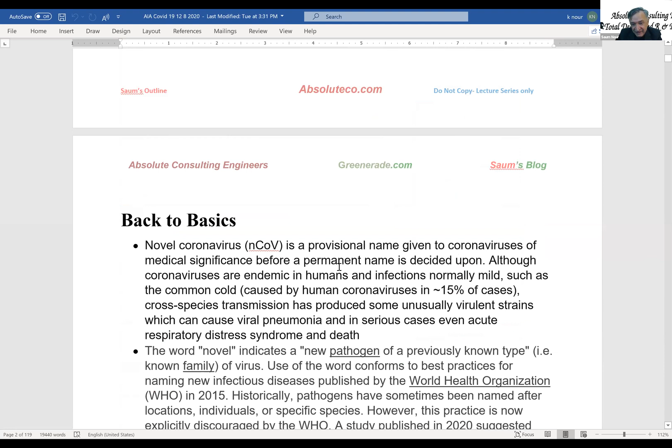Let's go back to the basics. Coronavirus is a virus that is out of a family, and it has little crowns. That's why it has corona. It has the word novel because it was the first time. They added 2019 to it because that's how it was found. There are two groups of people, WHO and ICTV and ICD, who decide on the name of a virus.

This virus essentially gives you about 83 to 99% fever, loss of appetite up to 84%, fatigue, loss of smell, bluish face to the lips, decrease of white blood cells, kidney failures, and very high fevers and so on. These are some of the symptoms of this particular virus.

I actually gave this talk in a minor short version of it in June 15 to the ASHRAE. At that time, we had only 2 million cases and 115,000 people died at that point. Right now, we are close to 15 million. Actually, as of today, we passed 15 million, and we got 283,000. In this particular case, we had about 1,000 persons dying every day.

That was what I call 5 plane crashes. This one is considered about one 911 per day. That is how bad this thing is.

There was one source that I would go to, but I changed my mind, and I'm now going to Johns Hopkins, this particular site. As of 8/26, United States is 14.9, 1.5 million people died in the world. Some of the numbers, especially in some of the African countries or South American countries, their numbers are not very accurate, especially like Ecuador, etc. So this number could be much, much higher than the 1.5. I will not guess at that.

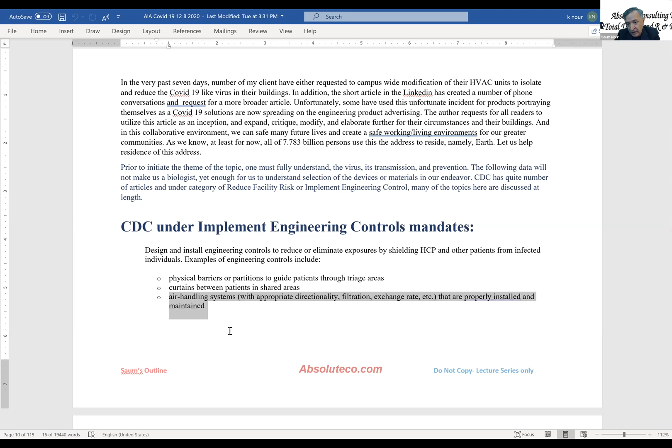Another issue is there's a town in Southern Orange County where we were going to change all their air conditioning systems, but because of COVID they pushed the budget 2-3 years out. The entire city hall is getting changed, and I'm redesigning it based on the items you'll be listening to today.

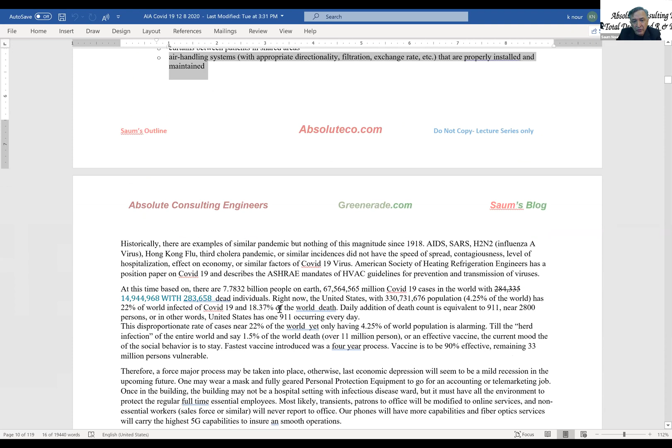So this is out there, and these are some of the numbers I mentioned about COVID - 67 million COVID cases out there. These were the numbers in June, and these are the current numbers. I mentioned 22 and 18.37% death, which is bad.

Let me give you one more item. This is a YouTube video from my brother's son, who is a scientist at the VA in Oklahoma. He sent this - it's in my blog currently, you can put it in, I'll put the whole thing there again. Please go to that - it shows in graphical form how COVID-19 actually attacks the system.

Let me give you two small items right now. The vaccine czar of the country is a Moroccan or Algerian guy, bald-headed, very tall, who simply said the reason this vaccine only took 8 months to make was that for the past 20-30 years they've been doing a lot of little subroutine programs for creating vaccines.

So what they did was literally take a lot of items off the shelves, and Pfizer or Moderna, or Oxford, simply took items from the shelf and reused them. But what's interesting about mRNA is that about 20 years ago, an individual found a gene within the body that can be taught to tackle any foreign elements in the body - that's the mRNA, and that's a 20-year-old item.

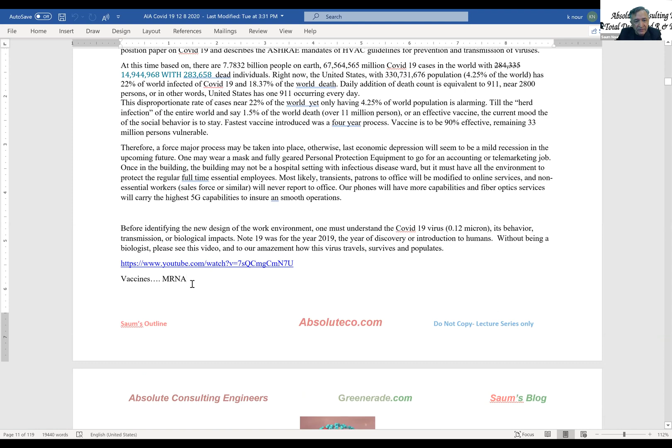I will find out who that scientist was. I would actually like to bring this up.

Just because you guys are architects, let me mention - in Paris, somewhere around 1853 to 1870, because of the major pandemic through the sewer system, etc., Napoleon III began modifying Paris, and it went all the way to 1927. They modified the entire country in a renovation called the Haussmann renovation. They remodeled the town in order to comply and get rid of all the diseases they had, based on overcrowding in the suburbs, etc.

In London, about 1854, there was a Broad Street cholera outbreak, or Golden Square outbreak. The same thing happened, and at that time 616 people died. That district was also modified in order to get rid of the infection. This was literally modifying the city - although cholera was not a sewer issue, they modified everything anyway.

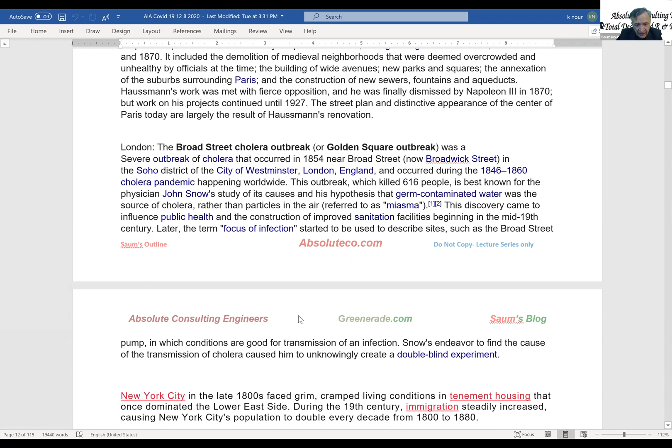Also in New York City, about 1800, it was called tenement housing. People were literally dying because of overcrowding and the squalor. And guess what - by 1900, about 18,000 buildings were built, housing 2.3 million people, about two-thirds of the whole city's population.

So I'm thinking those are at a city level. Based on our discussion, we'll be looking at - there's very little discussion on AIA, very little on ASHRAE, about what to do with the buildings. We'll have a little bit of examples.

And by the way, I am an engineer for 3 high-rises in LA, and unfortunately because of the cost, etc., nobody's moving on that.

But again, there are two areas that create change. One is when the legal battles begin. Right now the Republicans are asking, in the new money being released, that they give relief for all the employees of the factories or companies so they will not be sued. So there's that discussion right now, and that's one day old, by the way, this story. But the issue is you still have the civil court.

At the same time, the codes may start changing something - I know with Ebola, if you recall, when Ebola was happening, a lot of touchless, handless toilets and toiletries came about in bathrooms. At the same time, these have not gone away - influenza is still there, cholera is still there, malaria is still there. Those are emerging, and these were the previous ones still out there, with recent outbreaks.

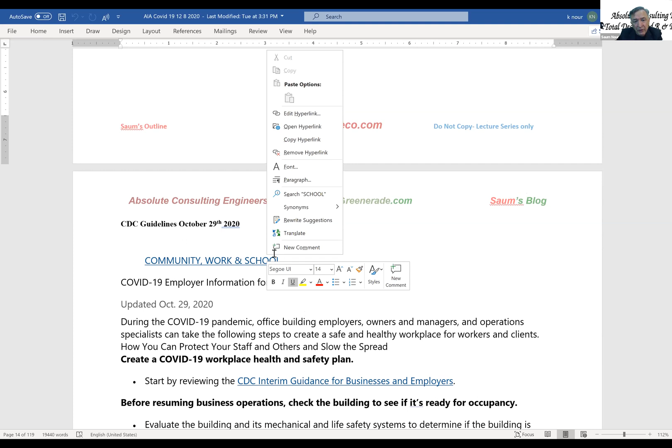Going back to CDC, if you want to sue somebody, you have to have a reference in CDC. I picked this thing up, and it's in 2 parts. By the way, these are hyperlinked, so once you pick it up, you can touch it and go to the hyperlink for the entire article. I broke it down to today's portion as well as part for next time. This was written for community work and school, and it goes through and brings up the following.

First of all, this ASHRAE guideline is very old. It has nothing to do with ASHRAE 160, nothing to do with our discussion. But all these other items, the stagnant water, rodent pest, and mold controls, are in the green code. Nothing has been addressed.

But I'm going to bring up this issue. Employers are responsible for providing a safe and healthy workplace. So if you invite people back to your workplace, God help you. I believe I have a slide that says once you pick up COVID, if you're asymptomatic, nothing will happen—you're just going to be a carrier.

Just to let you know, 34% of all the patients who went to North Dakota to do blood tests for something else, ironically, 34% of those blood tests came out positive for COVID. And they're assuming that 50% of North Dakota and the Dakotas are right now COVID positive.

That's another story, but just to let you know, if an individual picks it up, it's within 3 days before the symptoms actually begin. So if a guy comes in and becomes infected, and he got infected somewhere else—I have a very elaborate Chinese study I'll show you that he could pick it up somewhere else—he could simply say, look, I picked it up in my workplace, and that will trigger a case.

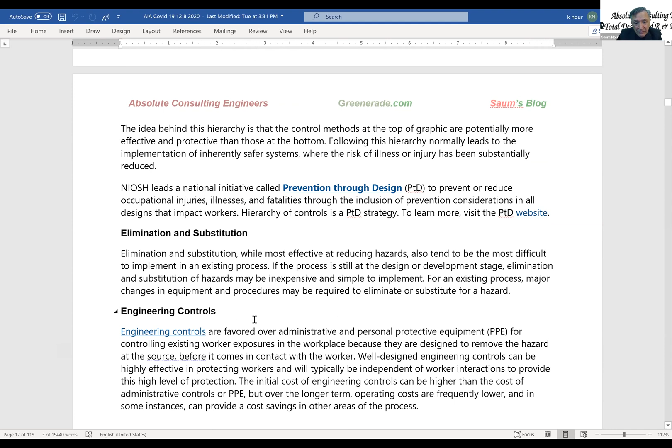Some of the engineering issues I'll be discussing here involve clothing, air conditioning, or isolation through NFPA 101 that you all are very good at. You have an administrative control as well as PPE. I would simply say you'll have someone like Bill Calvert or some sort of policy control within the company responsible to ensure everybody within your workforce is doing all of these administrative controls, just to ensure the company is safe.

Of course, you can modify and adjust the seating, furniture, etc. to meet the 6 feet guidelines, but I'll show you that this 6 feet is arbitrary depending on if you're next to me. I'm very active, I'm always jumping up and down, I could be 8 feet or 12 feet away. And if I sneeze, it could be 26 feet or 40 feet. So all of that is just to let you know it's an option.

One of the most critical parts is the bathrooms, and I have a section coming up in the next session. I'm actually talking to Zern on that issue - how do you make the bathrooms work, because that's the most congested section. And if you go to Home Depot, etc., they've blocked off some of the sections and so forth.

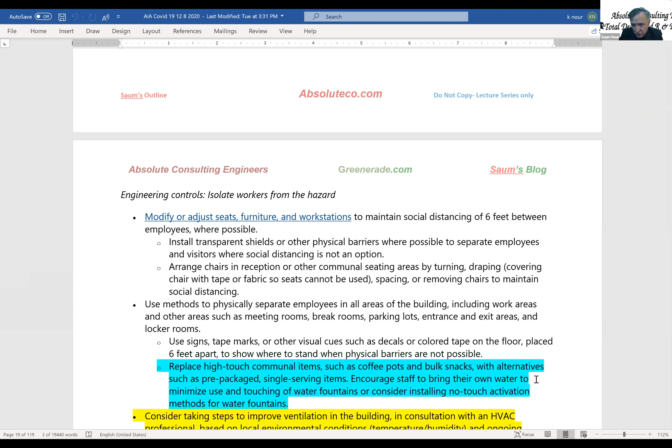I'm going to bring this up right now. There was a CNN conversation that simply says, if you're going to the airplane, what would you do? That simply says you want to have at best a minimum number of touches to the surfaces - your coffee maker, your doors, your chairs, etc. That's one part, so it would be a no-touch activation method.

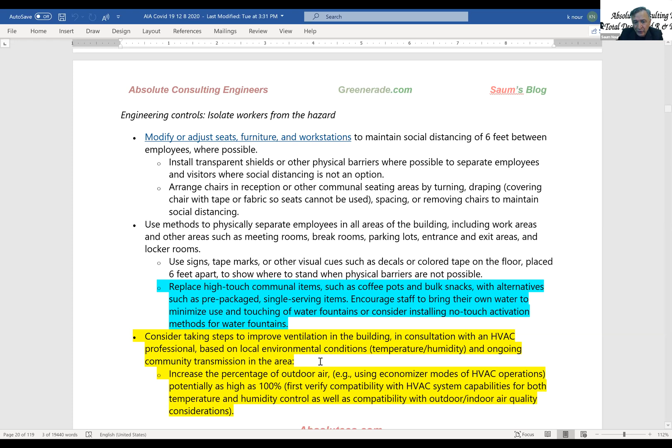And in this particular case, the HVAC - these are, I got to tell you, mumbo jumbo. It is there, but there is zero information by anyone on what to do. But these will be used when the Jacoby & Meyers calls you and simply says, did you do this? Did you do that? For those of you who don't know, Jacoby & Meyers are the attorneys who are ambulance chasers.

But anyway, this right here is total airflow supply to the occupied space. Again, if you recall, if you do LEED, or if you're just a basic building, the California Building Code as well as the energy codes require 15 CFM per person. But I can tell you, guess what - you have to maximize it if you want to reduce the liability.

Demand control ventilation - if you were in my class last year for Title 24, DCV is now part of the code. But guess what, he says, excuse me sir, disable it, out the door, goodbye, done. So you have to go in and double-cross that. It's no longer part of Title 24. So you're looking at Title 24 issues.

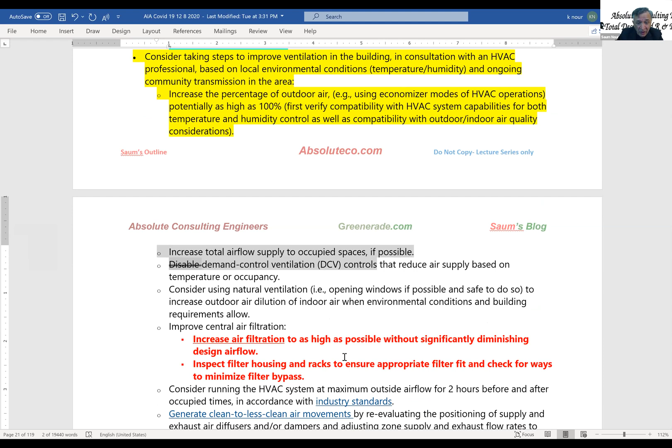They are asking for you to change the air filtration, and I'll get into very detailed information for that. By the way, just to let you know, once these filters are done and they're all contaminated with COVID, your air conditioning guy has to go with full PPE to remove them, because now these are fully contaminated and part of the process. So they want to make sure there's no leakage, and that's part of Title 24.

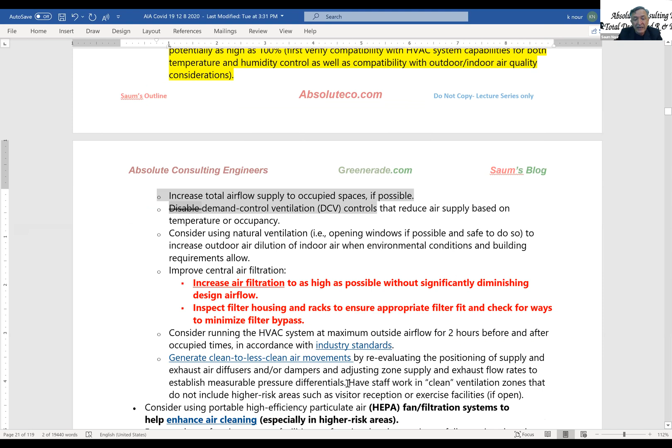And you want to bring some outside CFM - generally they call this morning flush out. At the same time, you want to change the room with fresh air in economizer mode, so that it starts again clean to less clean air movement. So if any of you have done hospitals, this would be the concept - you're going from clean to soil, etc.

I don't do a lot of hospitals, but I do small surgical centers. With regard to HEPA - HEPA you can consider it, but you can't use it. Why? HEPA actually has 1 inch static pressure. Unless you're talking about a laboratory, surgery centers, etc., you cannot use HEPAs.

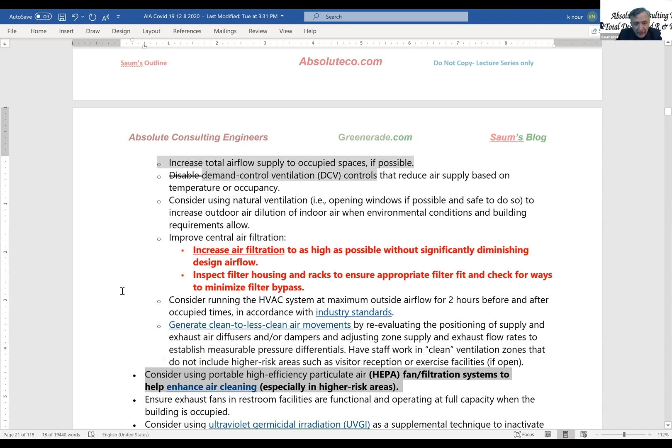Your normal air conditioning does not have that static pressure. So if somebody says, I'm using HEPA - and I've seen a lot of these churches simply say you're doing this, and ironically it's the pastor who is saying it - I believe they need to go become a mechanical engineer first before they do the preaching.

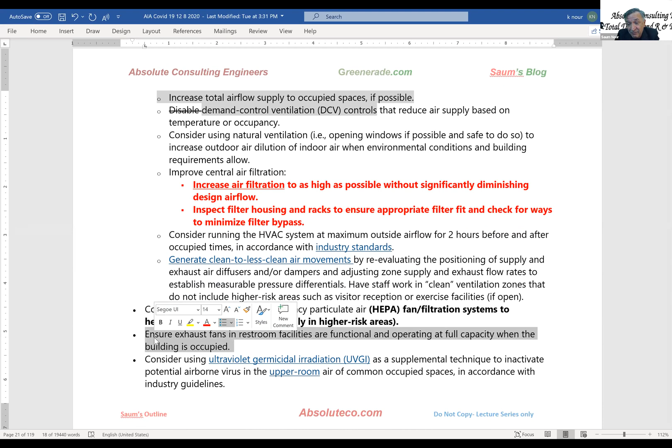And we are also talking about restrooms. The restrooms I am considering, remember that the code is actually asking for about 10 air changes. I always design by 20. In this case, I will create a hurricane. The most critical part is to create the amount of CFM within the exhaust fans, and also it has to be uniform, so it cannot be collecting from one person to another, and then exhaust out. We have to ensure that generally exhaust fans have only one point of entry. That has to be done.

Now, ultraviolet, and this is called germicidal irradiation. And the only thing I know about UV is extremely high. I have a very, very large koi pond, a very large one. So I put 120 watts, and I know all about it.

And there are 3 types of UVs, UVA, B, and C, and we'll discuss that a little bit later.

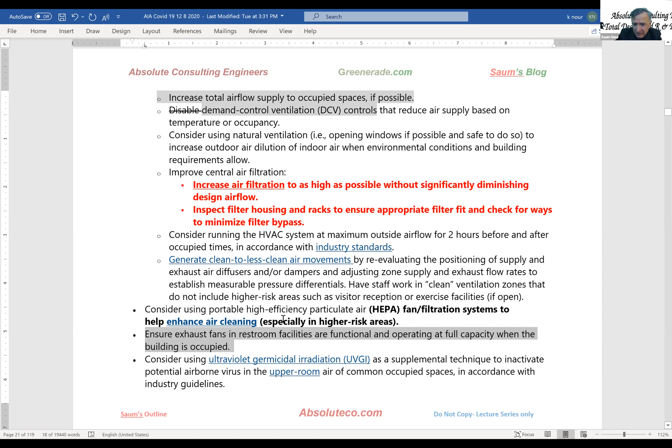So these are all coming from CDC. If you are looking at a reference, that's CDC. There were 3 publications that I bumped into, which I'm sort of bringing in. One was a British journal that was actually done for WHO and the European Union. It was very, very detailed, the appendices were very, very detailed. It was written in an extremely boring format, very, very boring. But the beauty of it is they discussed CFM, outside air, etc., though in liters per second, not CFM.

The Chinese, there are actually these 3 guys, Jia, Zhang, and Li. They've done a ton of papers on COVID tracing, and they've done a very, very good job, and I'm going to show you.

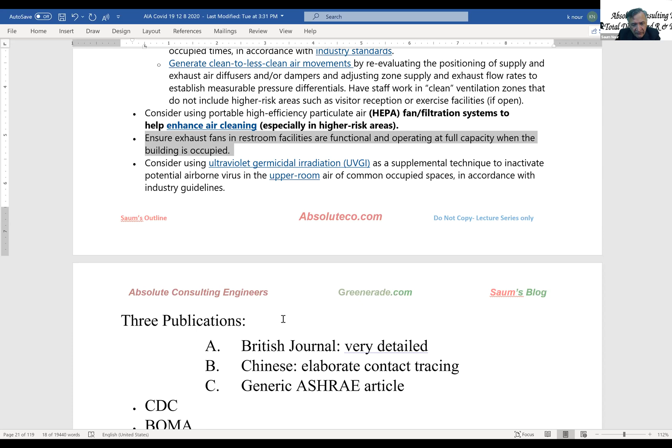ASHRAE did not get into this discussion, but they wrote a very nice generic article, and they do say that they don't have a publication or a paper that they could issue for the engineering community. There are a bunch of other sources, CDC that I mentioned, BOMA that I've actually put in for the next section.

Legal firms, I picked up some of their spiel, they're just getting ready to start suing people. AIA has it, but very, very, very generic, there is nothing there. Gil said that Orange County has a site, and Gensler has done a reference section, etc., but nobody has come up with anything. The only thing AIA has done is primarily telling architectural firms how to control their firms, etc.

One of the items I'm going to discuss is a trace analysis that Jia, Zhang, and Li did. They actually followed 3 towns, Liaoning, Heilongjiang, and Jilin. They went to these 3 towns and simply compiled all the individuals who were infected. How did they get infected? Let me show you, I'm going to zoom in.

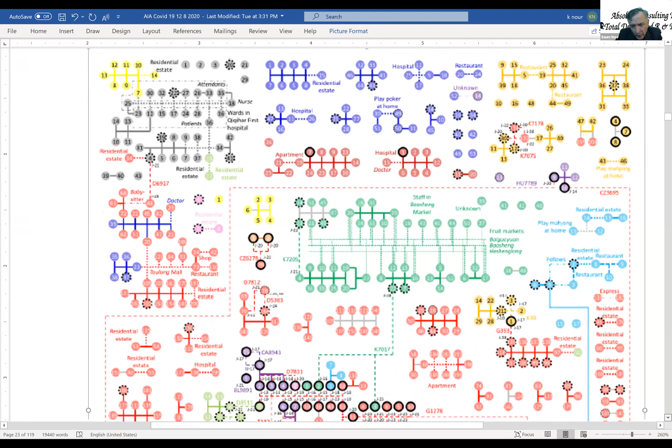How did they get infected? They did a very, very good study, and I will tell you where our discussion is. This is within restaurants, this is within public buildings. This is a family gathering, we will not discuss that. This is public vehicles in terms of buses and so on, we will not discuss that either. So we are interested in these public buildings and these restaurants.

As you can see, the very, very concentrated dots, as well as just slight differences - these individuals got infected, these were family members, and apparently this guy travels with a bus and infects these 2 individuals, and all of these individuals, and these are the different districts within a town that they went to. So this is very elaborate, very nicely done.

So really the most critical part for us is what happened and transpired in the restaurant, what transpired in the public buildings. And again, don't forget, once we open up and have the vaccine in our arms, etc., in my case just one arm, once we have it, the issue is do we trust it, in the sense that we have to be immune every 4 or 5 months.

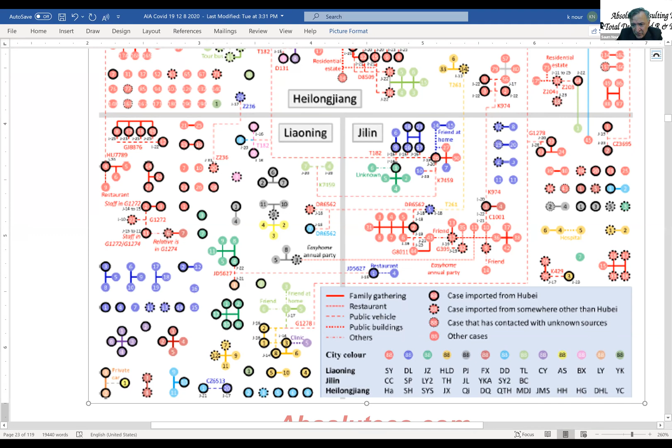We've got to continuously test it. And what happens if I'm within the 10%? I'm going to be causing more pain to others. So that would be some of the issues. This is one of the items we are discussing.

The Supreme Court has simply said, based on the First Amendment, churches can be opened and you can have a demonstration or do whatever, as long as it's First Amendment protected. I don't know what this means.

I know the church with 3,000 people that Trump went into in the beginning was in Arizona. The 2 pastors were simply saying they have all of these elements in the system, and we'll discuss some of that here. Again, all of these are probabilities. I'm a nuclear engineer, I studied probabilities.

So the issue is hopefully nobody dies. Even one person will trigger legal battles.

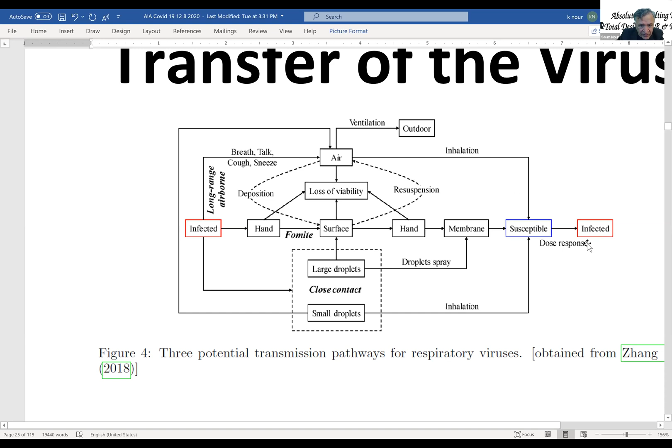Transfer of the virus, again, this was from Zhang's paper. This is the individual getting infected. He's going through the hand, going to the surface, a loss of viability, and he could be throwing droplets. We'll discuss the droplets and the contacts, and the droplets could go through a membrane, susceptible, and it could be going through the air, through inhalation, and you would be infecting somebody else. So these are the means and methods of the transfer.

So we have to know all of these issues and be able to do better design parameters. I will discuss in a few minutes on surface contamination. I did not know I'm actually going to be using my master's and my PhD work on this paper.

There are 2 theories I'm going to bring up. One is called Saum's theory - I wrote this paper in Nuclear Engineering and Design back in 1980, and I worked on nuclear bubble nucleations. It simply says if you have a rough surface with little bubbles of air and liquid, it's better for you not to have these - you want a very smooth surface so that you will not be collecting coronavirus infection on those surfaces.

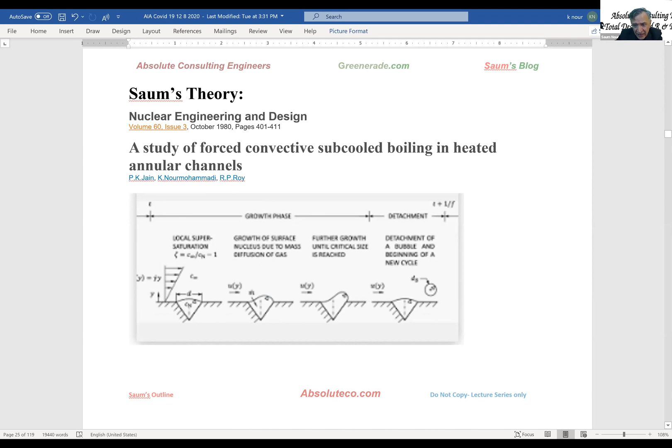At the same time, in my PhD, I was studying surface roughness in uranium mines. I have 3-4 papers out of this that simply say when the surface is very smooth, you're going to collect less radiation on the surface.

So the Saum's theory, based on those 2 papers, says that if you have a smooth surface, you can clean the contaminant easier, no deposit with time, and you will not have collection of contaminant sources for dispersing, i.e. COVID or whatever you have.

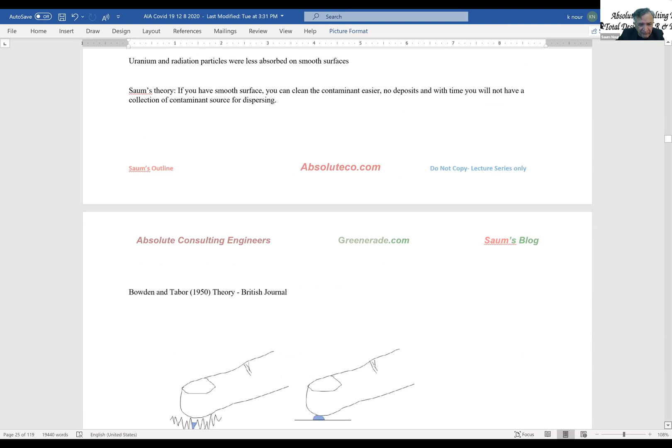Ironically, I ran into this paper which is completely opposite of my discussion, by Bowden and Tabor in 1950, that simply says, hey, have the roughness so your hand will not be touched.

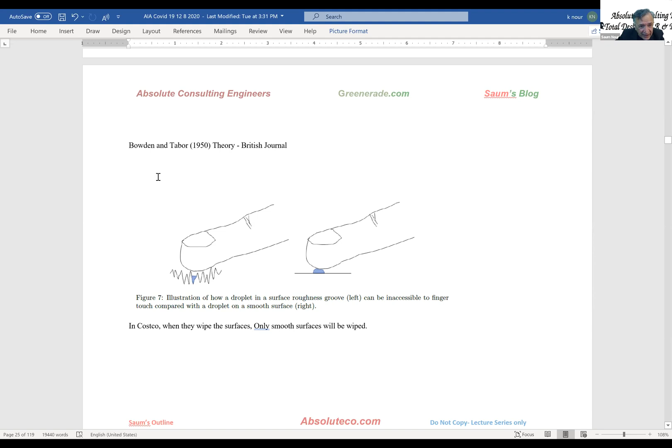Ironically again, if you go to Costco, every time you're in the self-help area, every time somebody uses it, the lady mops it out and washes and leaves. If the surface roughness is more, that lady will be scrubbing these roughnesses to get those elements out. I believe I am right, and I believe Bowden and Tabor are not correct.

Anyway, this came out of the same paper, Zhang's paper. Just to let you know, and this is very, very interesting.

In one of my past jobs, I was working on the Venetian mud on the walls, and the individual who was collecting it and making it actually sold it to Sherwin-Williams for the rights of it for 10 years. He was looking at adding aluminum oxide to the elements, because what happens with aluminum oxide is if germs, etc. sit on it, the life expectancy of that germ goes away.

And then the other issue is that if you use copper, for example, the survival of the aerosol COVID-19 is only 4 hours. Cardboard or paper is 24 hours, plastic and stainless is 72 hours, and COVID actually will survive in the air for 1 hour.

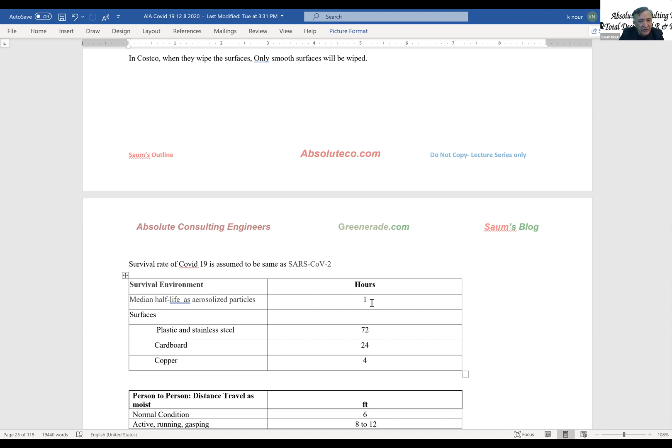So if you are dropping plans at the City of Los Angeles, they drop the papers, as well as Newport Beach - you drop the papers in a bin, and then 24 hours later they actually touch the paper, and they do the same thing in reverse.

Again, this discussion that you have here, because of time, I didn't want to put it in. There's a very, very nice projection, both Princeton as well as MIT, of coughing out of individuals. It goes from 26 feet to 40 feet.

Again, if you're like me, hyper, going back and forth, a very high decibel voice, that's 8 to 12 feet, and a normal condition would be 6 feet. These are the travel distances of the moisture without a covering.

Just to let you know that COVID-19 is about 0.12 microns, or 120 nanometers. If you have a surgical mask, that's 89% effective, not bad. A regular vacuum cleaner filter is 86%, then dish towel, etc.

Right now, in the beginning they were having a hard time getting N95s or these triple-fabric masks. They simply said just put anything there. Right now, they are begging people to use proper masks.

I can tell you the price of those masks. I used to buy them at $1.25, then 75 cents, then 30 cents. You can buy them at bulk price for less than 10 cents now, just to let you know.

When I was flying, I was putting on 2 plus another item. I was like a monster, or a surgery center, inside the airplane.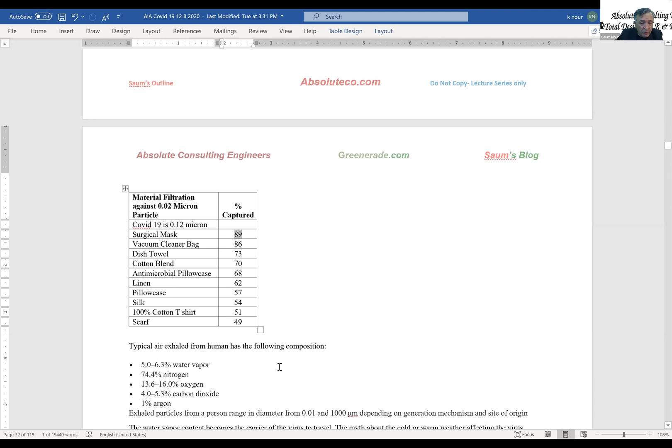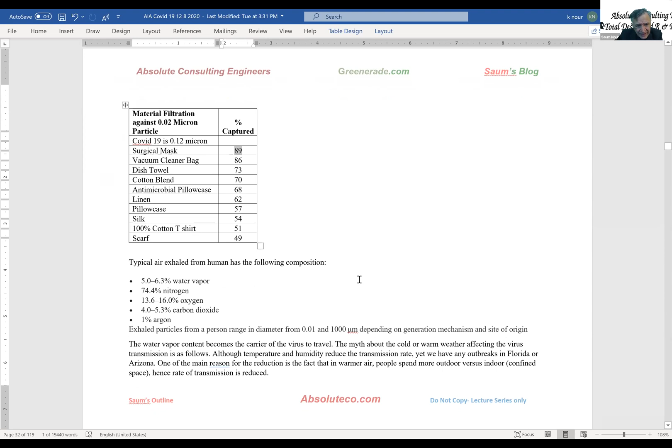But they are pushing and begging people to go with at least the pleated hospital mask. So anyway, there's all that discussion. All of this is discussion to get you ready with knowledge, so that we can build design parameters.

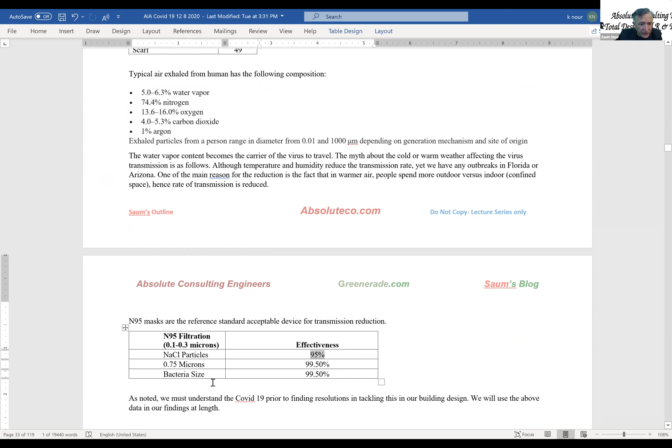Again, N95 gives you 0.1 to 0.3 microns filtration, about 95% effectiveness. Then you could have something more solid, better than N95, depending on the system and micron size in terms of bacteria size. But a virus is much, much smaller.

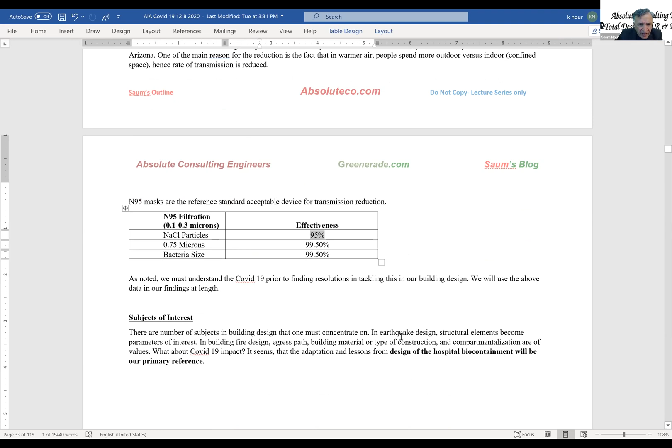The other items I'm bringing up, we've all studied as architects. We know the building design issues, and we're going to concentrate on those. When we're in an earthquake, we have all these seismic elements. When we deal with fire, we're dealing with compartmentalization, NFPA 101, Chapter 3 and Chapter 5.

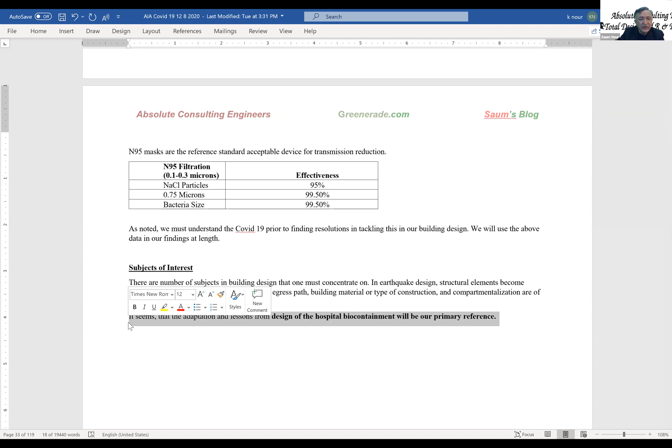What about COVID-19? At the end of the day, really, it becomes partial fire design and partial hospital design, partial of everything. We have to take all of our subroutines of knowledge that we put on that shelf, pick them up, and use them for the interest we're looking at.

Again, I just pray that AIA Orange County will form a team or a group so that I will not be the only spokesperson, and we can go into different tangents, especially on surfaces, on different formats.

My DNA, because my father was in stone and I'm a stone man, I put a ton of it in my house. You want to have the grouts with the minimum format, so you have the least grooves, et cetera. Those are some of the issues.

So again, I'm going to go back. In one of my educations, I spent 3 years at UCI studying fire protection engineering, so I really got intimate with NFPA 101. NFPA 101 is technically the gospel of the California building code, or the CBC, or the building code, because of the compartmentalization, the fire egress, et cetera.

Everything comes from there. So really, we could take a lot of lessons from there and apply them to COVID-19 design formats. Now, if you go to Walmart, of course, nobody actually follows it perfectly.

They have put in pathways, so no two individuals' faces will be crossing each other. They have separated the exiting and the entrance. Mind you, you still have to have fire exits, etc., but for COVID-19 you have to have a one-way path: you come in from one door and leave from the other, so no two points cross.

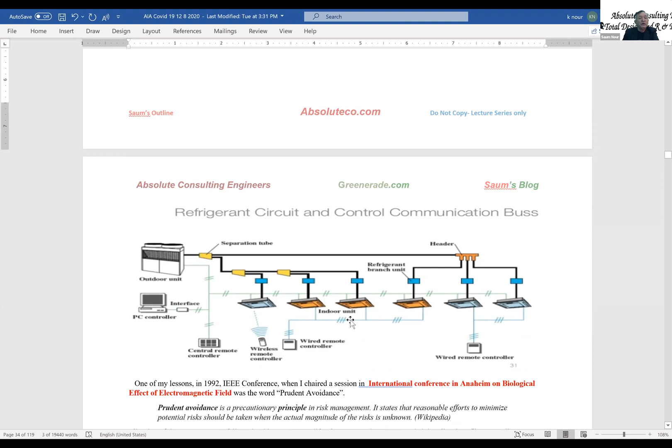In the high rises, there is a solution, or for existing buildings which have VAV boxes, there are solutions for them that we will discuss next time. I'm trying to stay on the basics right now. This is a system I just discussed. You have the outdoor unit, and you simply feed all of these throughout, and you bring fresh outside air to them, with a central exhaust fan, with no kind of cross-contamination from one area to the other. Each one of these will have all the amenities that we will discuss very shortly.

In 1992, I chaired an international IEEE symposium, an international conference in Anaheim on the biological effects of EMF. I don't know if you recall, people were saying that EMF was going to cause cancer. And every time I would go to a building, they'd call me Dr. Bzzz, making fun of me. And I learned one thing there: it's called prudent avoidance.

Technically speaking, if you are the architect, you have to do the same thing as with Y2K, the Y2K 2000 issue, everybody had those CYA notes back then. You may have to add a note stating that you are still designing the system the old way and not considering COVID in the design. You have to announce that, maybe in your contract.

At the end of the day, prudent avoidance simply is a precautionary principle in risk management. It states that reasonable efforts to minimize potential risk should be taken when the actual magnitude of the risk is unknown. So if you don't know it, you just do due diligence, and that had to do with where you put the electrical systems, where the electromagnetic field was, and whether that was causing me to lose hair. Was that EMF, or was it just age? Regardless, that was a lot of issues.

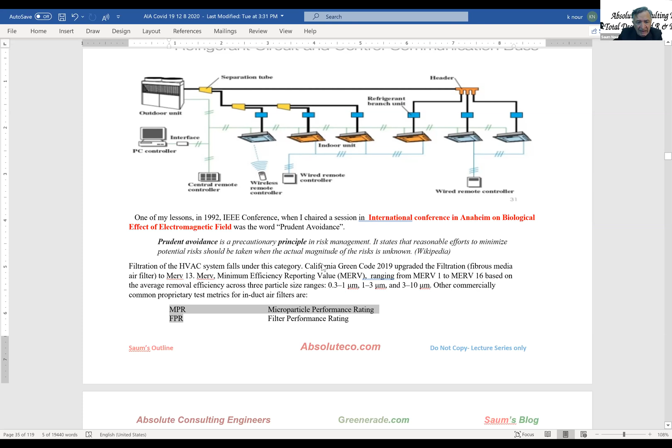Now, what is happening in MERV 13, MERV has nothing to do with Merv Griffin, the guy who had the TV programs. MERV essentially stands for Minimum Efficiency Reporting Value, and it goes from 1 to 16. Once you go through 16, you jump into HEPA. I will guarantee you, we have done the studies, and I highly suggest you cannot use these. MERV 16 is very expensive, and MERV and HEPA have very high static pressure.

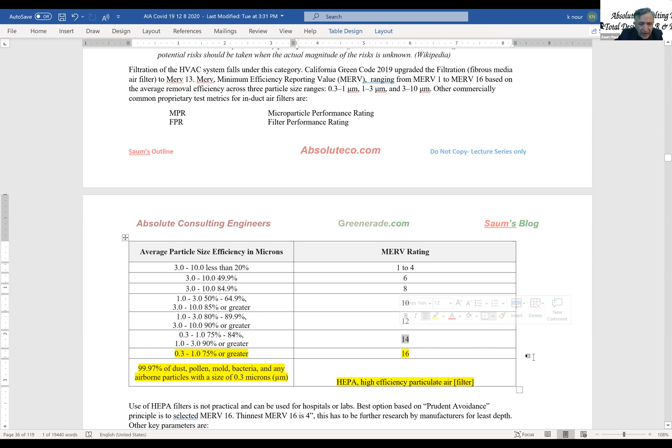You really can't do much with it, so you're really stuck with MERV 13, which is right between the two, and that's where the problem is. We have actually done this study in a couple of places, and it did not work well. We are really trying to make sure that the air velocity comes down, and as it comes through the filter, it has to be about 300 feet per minute. If you're at 500, the efficacy of the filter just goes down.

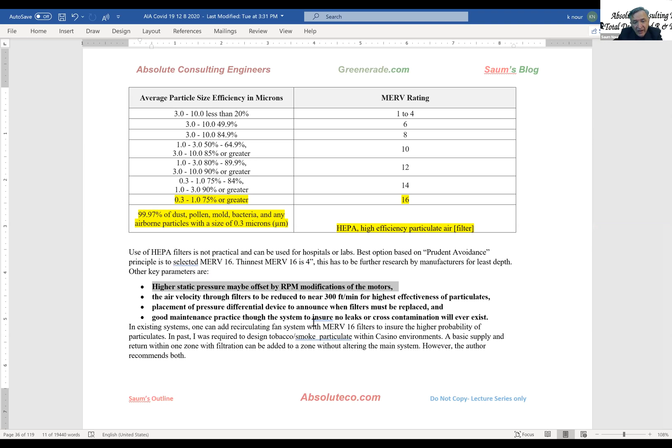There's also the placement of the pressure differential, etc. As soon as that filter is concentrated beyond a certain point, you want to change it. And don't forget, the person literally has to be in a spacesuit to go in and take them out, because now those are all contaminated. You have to have good maintenance and make sure there is no leak, so you don't have a giant hole where all the air is passing through. You've got to make sure that's being picked up. So those are some of the issues we're looking at.

The heating and maintaining of these, by the way, I did not write these myself. These all came from different papers, CDCs, etc. So the issue of HVAC is that you want to have the right indoor temperature and humidity.

By the way, humidity does have an issue. Odor, we are not going to discuss. Removal of the contaminant air, which is what we discussed. Susceptible staff and patrons - you want to make sure the requirements protect the individuals who are there, and you want to ensure the risk of transmission to the individuals is less.

Now, these are some of the discussions that I'm going to bring up. And by the way, I'm going to open up at some point - I really want to get your opinion. If you put it in chat, I'm going to copy them and maybe put a response, because this is a very new frontier.

I know a lot of you have come with good backgrounds in architecture and different formats, construction, etc. So we all need to put this frontier together. And again, this thing is not going to go away.

By the time we are done with this infection, the vaccine, etc., if we do it correctly - and I'm going to put a correct quotation, if we do it correctly and if everybody gets vaccinated - you're looking at beginning or middle of next year, or maybe towards the fall of next year. So just an FYI.

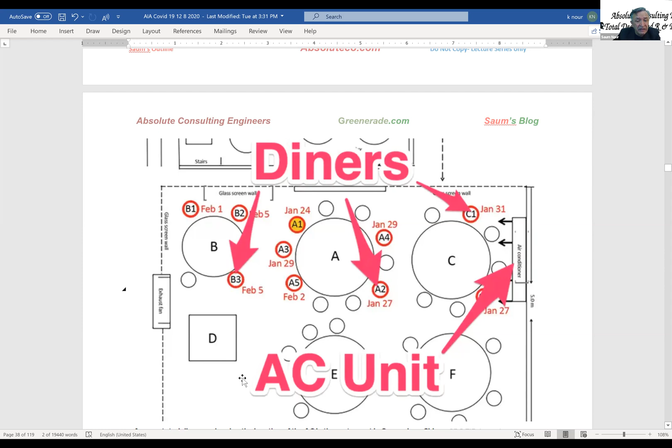You can see the air conditioning path was going this way, and that's where A1, on January 24th, 29th, 27th - A2 picked it up. 29th, A4 and A3 picked it up. Then in January 31st and 27th, these 2 picked it up. Then in February, ironically, these individuals did not get it. This goes back to my statement - the design of the air conditioning, etc., is interesting.

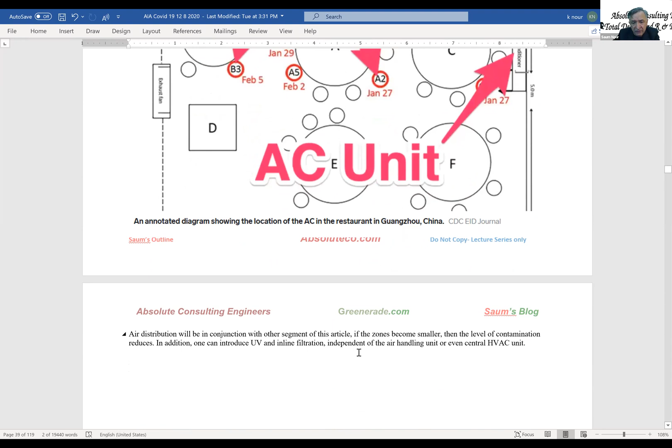This was in Guangzhou, China. They are simply saying that by adding UV lights, inline filtrations, etc., you could reduce this probability, and it will show some of the probabilities there.

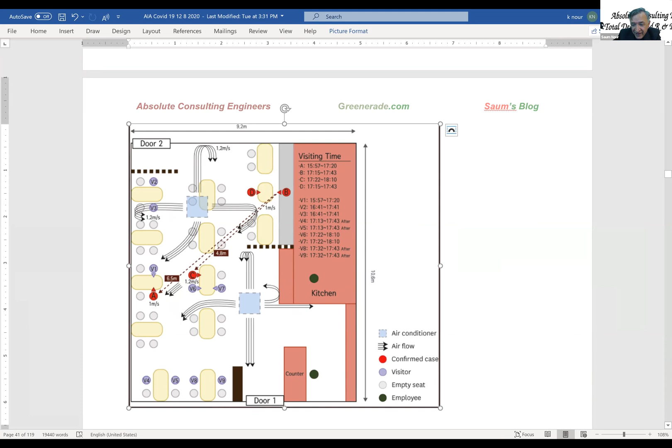As you can see, I don't go for a haircut - I've been cutting my own hair. With one hand, one side looks good and the other side doesn't, so it looks like the Phantom of the Opera. And I will not go for a haircut.

In any case, they are simply showing that they were 21 feet away, and in 5 minutes the interaction and the infection occurred.

As you can see, 3 families - 9 other people across 3 families got sick, and so on and so forth.

There was one incident that happened in Irvine. There was a wedding, a kids program, some religious program for a kid, where 238 people were in that party in Irvine. The family members got it but did not know. They went to Mexico to another family member and infected the entire family in Mexico. They came back. The lady was the 4th Irvine patient who got hospitalized, and the son, the father and the daughter were not hospitalized, but the mom was the 4th COVID patient in Irvine.

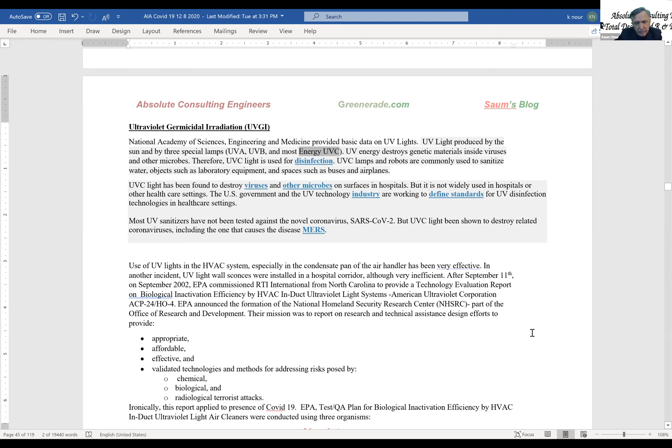The other beauty is that also within an air conditioning system, it also gets rid of the mildew within the body because the light propagates through the air conditioning. It actually gets rid of the mildew throughout a good distance on both sides of where this air conditioning is placed. By the way, UV is not new. UV has been there, and most of the high rises have been putting it in regardless, long before COVID.

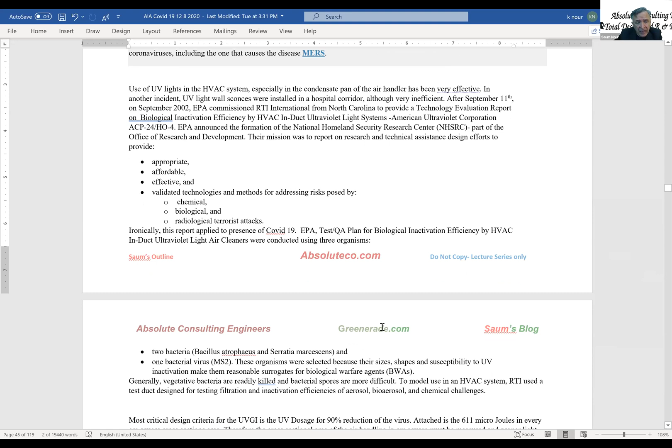And the bacteria are definitely gone, 90% reduction. UVGI has a 90% reduction, and I understand it's more like 9,000 hours as opposed to 15,000, but don't quote me on this. I put this down, but it's less than a year.

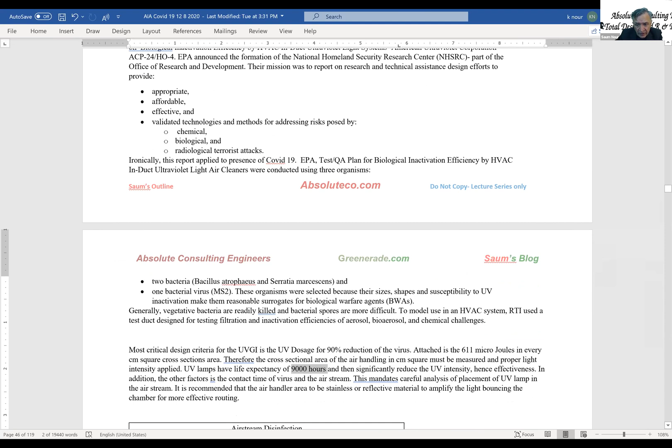The old UV, I do not know the new ones, but in order to look at the UV doses, you're looking at for SARS, etc., 600 microjoules. Joules is in watts per second, 600 per centimeter square. So if your air conditioning is X amount, your value of square feet, you multiply it by the appropriate number, you get the centimeter square. From that point, you get the wattage you need.

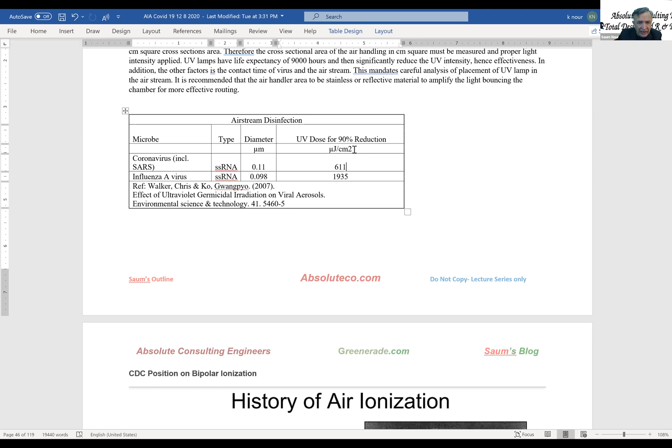There is another factor which I've never been able to pick up from even the scientists on this: the contact time. What is the contact time of this UV and the airflow? That has never been mentioned. In my pond, I have a 2 feet system, and the water is going at about 20 feet per second through that 2 feet, so it's about 0.1 second. The water sees this UV for the energy that it sees. That has not been quite clarified.

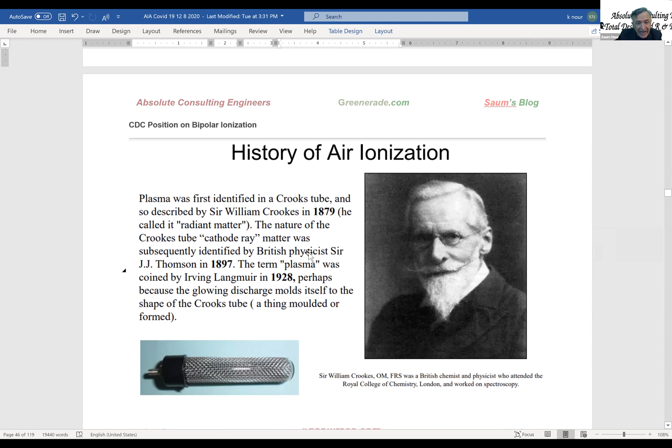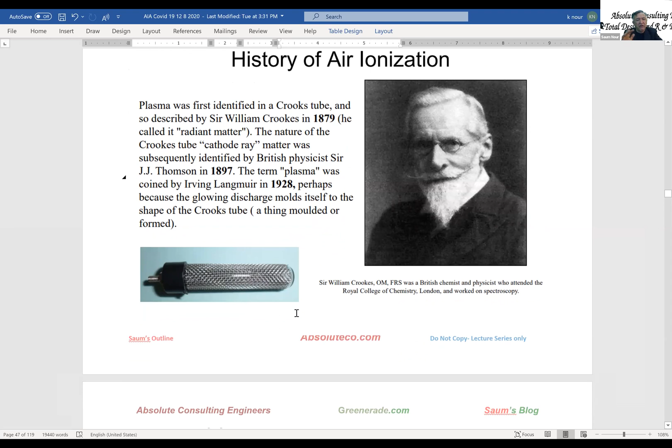Believe it or not, this is very, very simple. I asked Gil if there is any format, because I was trying to find a couple of companies to give out some little cookies or something. I was going to put together a quiz, and if anybody wins the quiz, I could have that company send you a little gift. I was not going to do it.

But one of the questions that I have is this: if dust is heavy and gravity brings the dust down, why would your ceiling get dirty? So if you know the answer, please throw it on the chat. I'd like to find out if you can go that far. You can think about it. But I'll give you this - it's called van der Waals forces. Van der Waals forces is that all dust, especially when you look at the sun passing through your window, you see all these little particulates. All those particulates actually have a charge, and if they get close to another body...

The ceiling that is charged, what happens is they get attached, and that's why your ceiling gets dirty. But anyway, that was the answer for that.

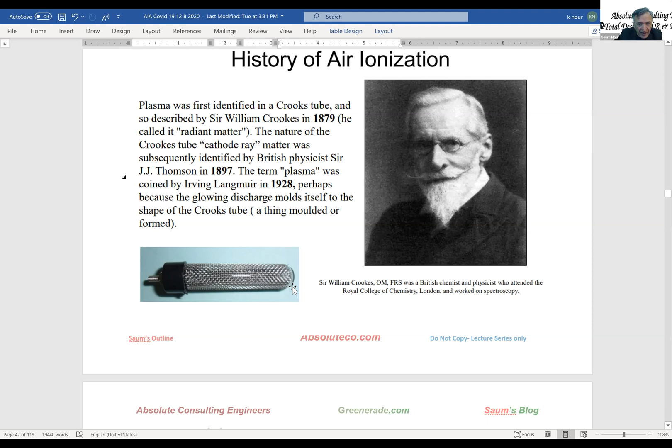But anyway, you have Mr. Crookes coming out with this. I can tell you when the UV light is added, it's in that system and it shines in terms of the wet side. On the dry side, what they do is as follows.

This right here is a bipolar ionization. It's very, very simple, by the way, very low voltage. So what you have is a device like this.

You have a pole here, you have a pole here. This is positive, this is minus. You literally add it to a battery, for the sake of argument. What happens is that it creates a magnetic field right here. So when the airflow is actually passing through...

...all these ions and the bacteria, et cetera, what happens to them? They all get ionized. And guess what? When they get ionized, their positives and negatives get collected together. Remember, we said MERV 13 will not pick up the viruses. Now they will, because these ionic bipolar needles are not very expensive.

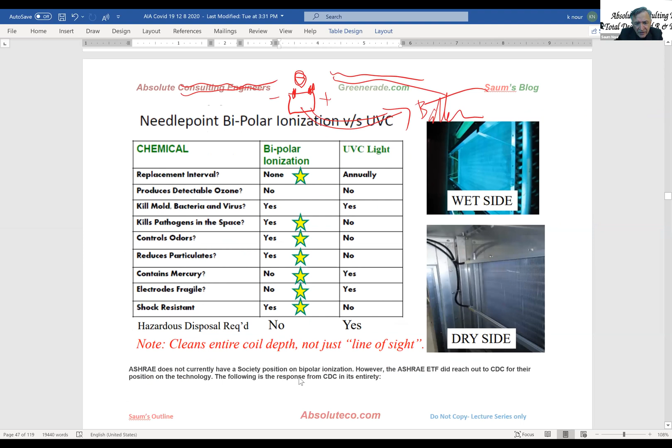I'm going to be actually buying a couple of them and start doing my own little experiments. So anyway, that's what that is, the bipolar. The only issue is that they have to be listed by an organization, UL 2998.

One of the reasons is that these ions, too much of it is bad for global warming. And guess what? If I am promoting it and everybody goes out and buys it, if you're going to affect the ozone layers, et cetera, that would be the issue. So really, that's the component. They all have been tested, and you buy.

Now the irony is, I was at Costco. There are all these mumbo jumbos. I don't know if anybody knows where the word hocus pocus comes from.

Hocus pocus in Latin is hoc est corpus, this is the body. The Christians were saying this is the body in the church. The Latins were saying hoc est corpus, hoc est corpus. They thought it's magic. So hoc est corpus became hocus pocus.

So essentially, there are a bunch of hocus pocus out there in Costco, and they're saying, I'm doing this. I'm not quite sure where they're going, especially when they're saying they're going to be picking up at the HEPA rating. The fans are so small, there is no way in the world they can go 1 inch static pressure. So that's where the hocus pocus comes from.

So in-room portable air cleaners are out there. Again, there's a delivery rate and there's an air change per hour. Let me give you one item on the air change per hour.

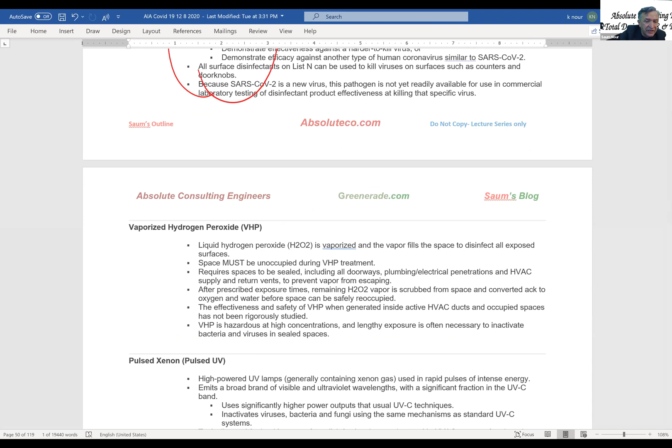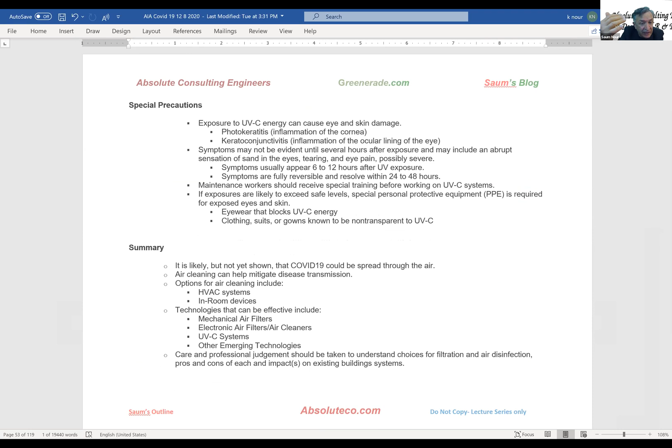At the same time, you're looking at COVID-19 spread in terms of a little summary I put in - that's the HVAC system, in-room devices, mechanical air filters, electronics, UVC, and maybe other emerging technologies. I'm not too much of an ozone guy, but I'll leave it at that.

So the other issue is that I really wanted to move to the next section. I'm speaking at 90 miles an hour - I'm at the end of part one, but I'll go on to the others. I may want to entertain questions right now, but let me just give you this.

At the end of the day, if you're going to go to a lawsuit, a BMP will be required - all of your systems, all your design guidelines, etc. If you're part of that building, I can guarantee you'll be part of et ali, which in Latin means 'and others' - it could be your cousins, etc., who were just having lunch in your architectural firm. Who knows where these attorneys - by the way, the only reason attorneys in Chicago have their hands in their pockets is because it's cold. In every other state, their hands are in somebody else's pocket.

Going back to this, we discussed compartmentalization, which is NFPA 101. Filtration that we talked about was the UV system - sorry, filtration, which was MERV 13 because it's the code. The other options are too expensive.

Ionization - we want to ionize them so they'll coagulate, become fat, and be captured. But don't forget, if you let the air conditioning company design that, they will not put it at 300 feet per minute. And if it's not 300 feet per minute, when particles go through the filter, they won't be captured. Every one of these - the air conditioning contractor will have a small filter, as opposed to the design firm, which will have it at 300 feet per minute, depending on the CFM.

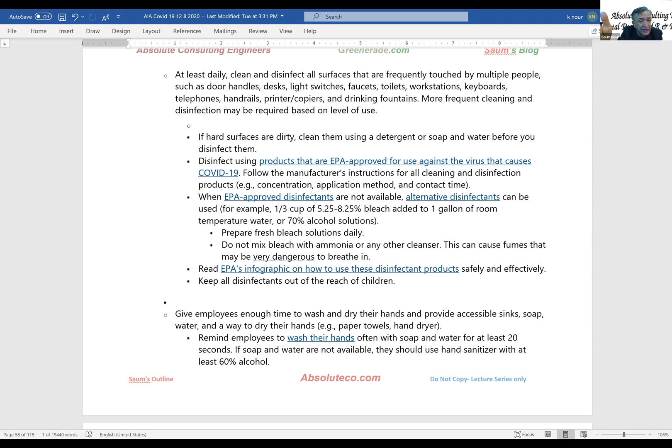So that's just an FYI for your designing. Just so you know, the hand dryers are all gone, God bless, and the drinking fountains are all gone too. All of these systems that were part of your design are no more, or as they say, no mas.

So there are other policies that you'll be trying to implement. Technically speaking, there are quite a number of companies that will not bring their help desk centers into the company. They may just simply leave them at home to do this work. I know with my three kids, they're all in graduate school, and none of them are going to class. When I was a professor, that was a very, very odd thing, but now it's called a normal thing.

And again, the etiquettes that you're doing for restaurants, healthcare centers, etc.—you have all that as part of the system. I don't know how far you would be getting into the CDC guidelines.

I put down all of these references on CDC for next time, so you guys will see it. At the same time, I put down BOMA, because most of the high rises I have dealt with use BOMA as the primary reference, especially on their guidelines, etc.

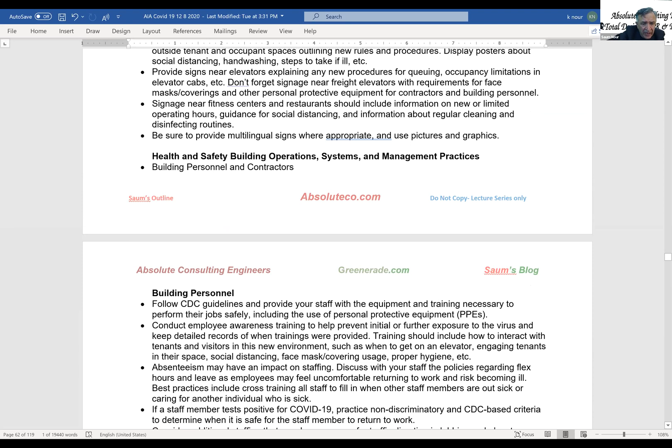I put this whole thing together and transferred it into a Word document. I am going to—again, these are there, somebody has their system not muted—but anyway, communication with tenants, etc., these are all part of BOMA. I put it in there just in case you are dealing with property managers as well.

Then what I did was, again, COVID information. I went through quite a number of these—this is the AIA, the main AIA website, which is really doing nothing except talking about how to run your company. Let me go to open up to questions or discussions, only because I'd rather—oh, this is the National Law Review.

I'm going to bring up the court cases that are out there, and this discussion has begun—either somebody dies in the building and the codes are initiated. I always say, when I was getting my civil license, they always said the question of whether a street block is going to get a traffic light comes down to how many people died or how many people had an accident at that location.

Otherwise, the city will not spend and put a traffic light there. But I am just thinking, if there is any, I'm going to go back to the chat room, or if you want to entertain any questions.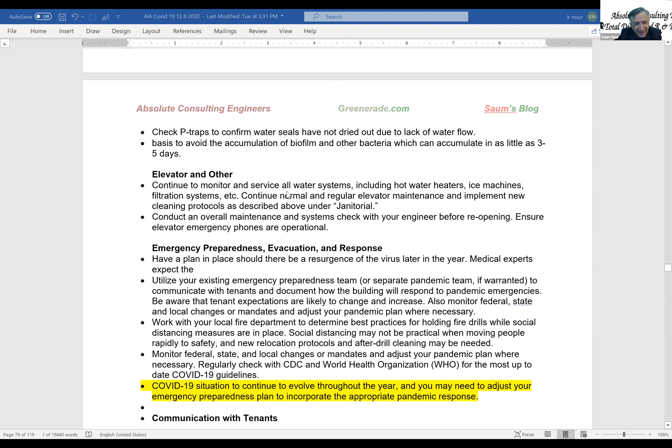Bill, do you have anything to add? I don't know if Bill Calvert wants to chime in, but overall, I'm just thinking out loud that we've got to do something - the silence of AIA, the silence of ASHRAE, the silence of everybody. The only issue is that the manufacturers found this opportunity - Kelly just mentioned it, Adrian just mentioned it - they found the opportunity, so now we have it, and now it would be great to use it. That would be prudent avoidance, remember we talked about it. You should add to it because it'll give you another flavor, but at the same time it'll help the system.

I don't see anybody else raising their hand, but the most critical part is I am going to ask you all to be extremely safe. The number of cases I'm going to be showing here is quite high, and the more I speak to it, the more scared I was getting. This was a building ventilation system.

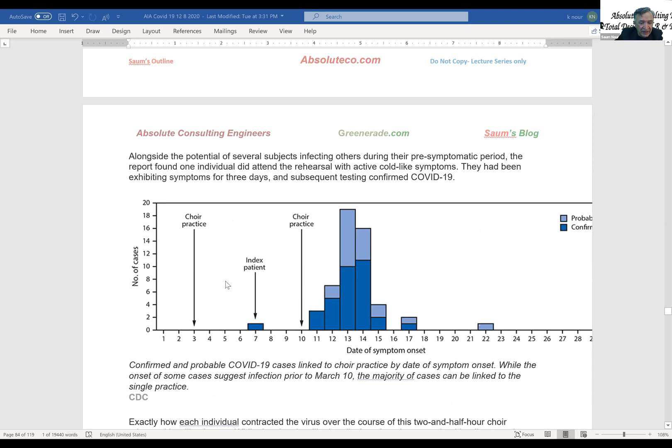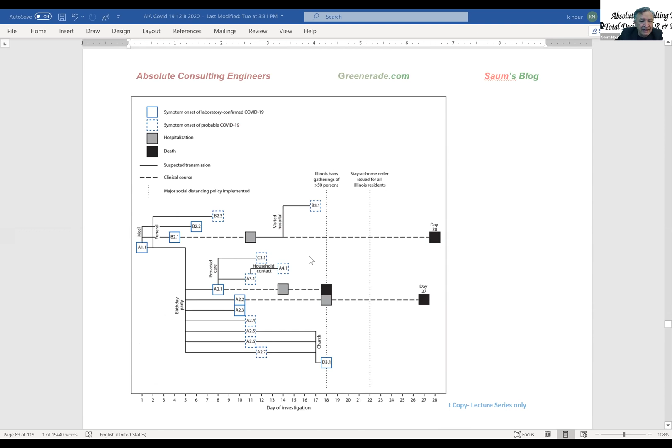This was a choir practice - 2 deaths, 53 cases, 53, I think I mentioned it. This was the choir practice, the timing of when they met, the practices. And then I have another one, an extended family gathering in February in Chicago. I have more which I have not put into here yet. This is the form of contact - we are looking at how to ensure within a building we would be able to stop that.

Now the irony is, I'm still baffled that the First Amendment has overridden the health issues, where churches as well as protests are concerned. There's a First Amendment, you can have it. So the most critical part is maybe we should attack that as architects and engineers. We should attack that first, just an FYI.

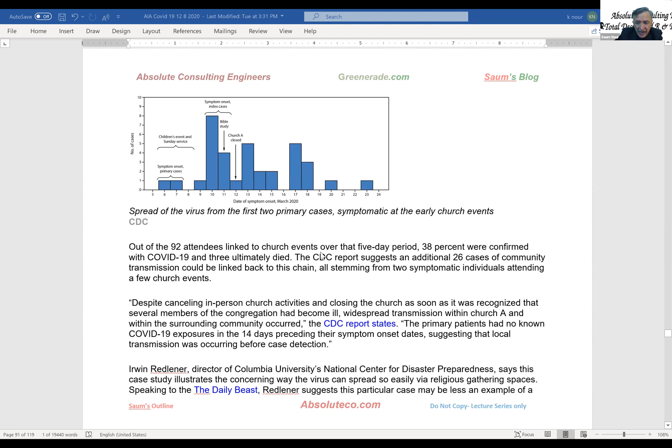I will be putting Rich's work in so we can enjoy what he's already been doing, that's great. The only thing you haven't done, I guess, is the needle point ionization, correct Rich? No, I have not done that. That's something I need to take notes on and learn more about. That is very cheap, you can always add it on. And Adrian, I would love to see any write-ups on that so we can show it off for the audience next time.

Hey, so I'm Bill. Hi Bill, go ahead, okay.

No, the only thing I wanted to add is just, be cautious anytime you're trying to engineer out a hazard, to make sure that the hazards you're creating with that, or changing that hazard environment, that you're taking into account some of the controls farther down in the hierarchy, as far as administrative controls, PPE, lockouts, whatever, that also have to be there.

With high energy UV, you have part of that band that is considered and confirmed injurious to humans. And then you also have part where the evidence suggests it's not injurious, like around 220 nanometers, coming out both in LEDs as well as in emitting tubes. But the emitting tubes will only isolate those frequencies to a certain extent. And if there's anything wrong with those, or at end of life, say they get scratched or damaged or cracked, they can give off other wavelengths that aren't protected. So you've got to consider that when engineering your solution for occupational exposure issues. The American Conference of Governmental Industrial Hygienists actually has a really good handbook for folks designing this, the TLV BEI book, and I put it in your notes as a reference. That might help folks considering that.